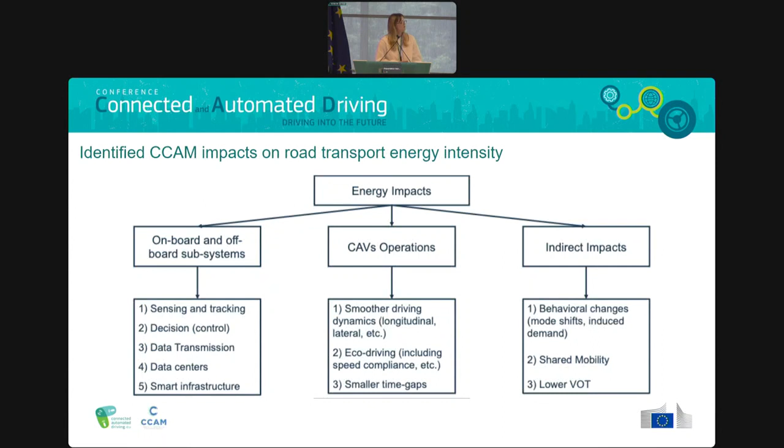So, for example, people switching from walking to automated mobility or from cars to automated mobility. So these are the 3 aspects that we identified. And then this is the framework which we followed.

So first, to understand how we can quantify this, we started with literature review. Then we classified the vehicle tasks, the tasks that the vehicle needs to perform to drive autonomously. And from that on, we conducted a workshop with members of the CCAM Partnership in March 2024 here in Ispra to validate our approach.

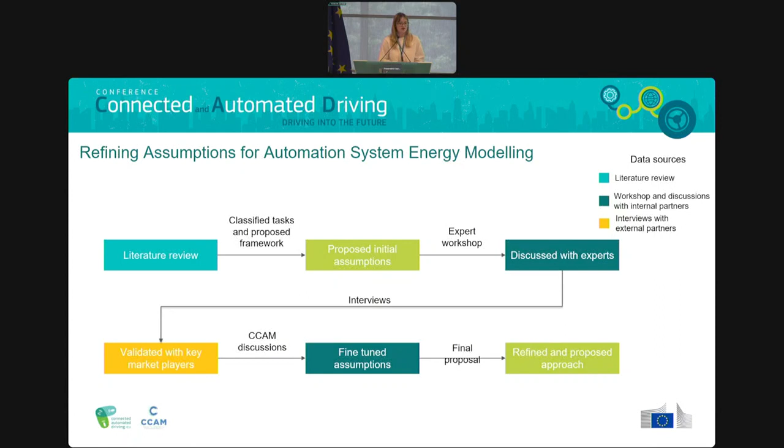After the workshop, we also conducted interviews with key external market players. And from then on, we started to refine our approach again with the CCAM members. And so the work is based on 3 data sources: literature review, the workshop with experts, so the contribution of the CCAM partnerships, and also information from the external companies and partners.

So what we can see here is the first pillar of the energy impact. So the energy consumption of the technologies that enable automation. And we have 4 configurations because we are, of course, not sure how automation will look like in the future. And first, let's start with the prototype configuration, so what we currently could have on the roads.

So what we saw is that there is full sensor redundancy, so we have LiDARs, radars, multiple cameras, and high onboard processing load that could sum up to 2,000 watts of power. Plus off-board energy for tasks like HD map updates and video storage. And this represents the early stages.

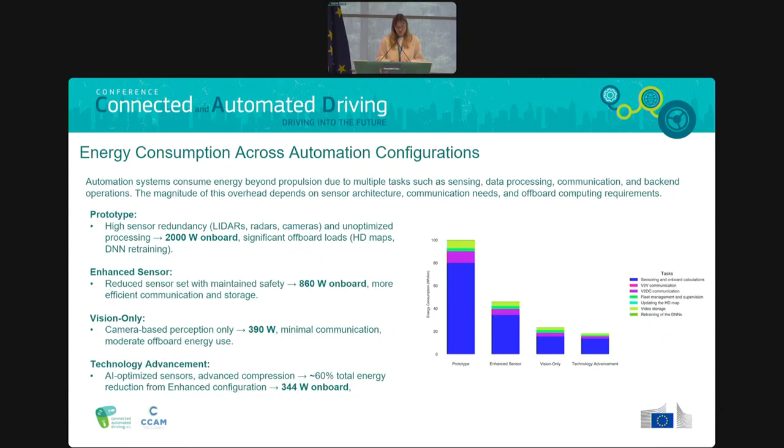Then we have the enhanced sensor configuration, and this reflects more mature market-ready systems. It uses a reduced and optimized sensor set, keeping the safety intact, while lowering onboard consumption to 860 watts. And communication and storage are also more efficient, cutting overall energy demand by more than 50% compared to the prototype.

And then we have the third configuration, which is a bit different because it's the vision only. So the car would rely only on cameras with no LiDARs and radars. So of course, again, the onboard consumption lowers to 390 watts, but it's still uncertain whether the industry will move in this direction at scale due to current concerns about the reliability in complex environments.

That's why the final configuration, the future configuration that we could envision, is based on the enhanced sensor setup. It assumes next generation sensors, edge computing, AI-driven data optimization, and more efficient communication protocols. And combined with smarter off-board infrastructure, so better data compression, hybrid storage, energy-efficient cooling, this setup could reduce the energy consumption of the automated kit by 80% compared to the current prototypes we have today.

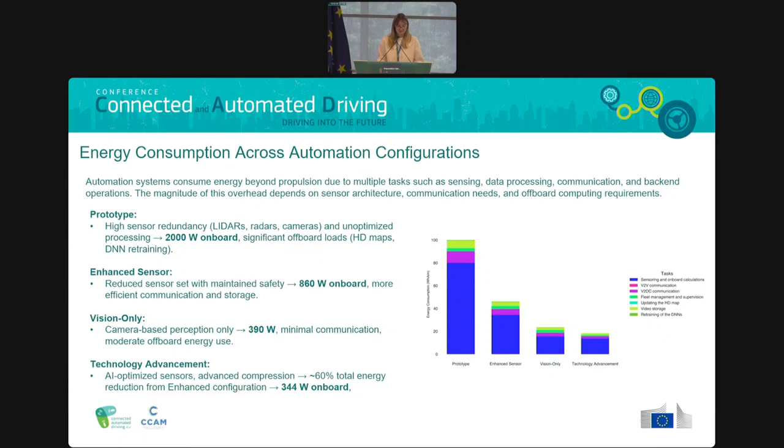First, they decide whether they will travel at all that day. Then they decide for what purpose, how many trips, which modes, where to, which time. It also allows to generate a stop on the way. And once we had all those travel patterns for every agent in the simulation, we implemented them into AIMSUN, which simulates the traffic flow and allows to estimate the energy consumption.

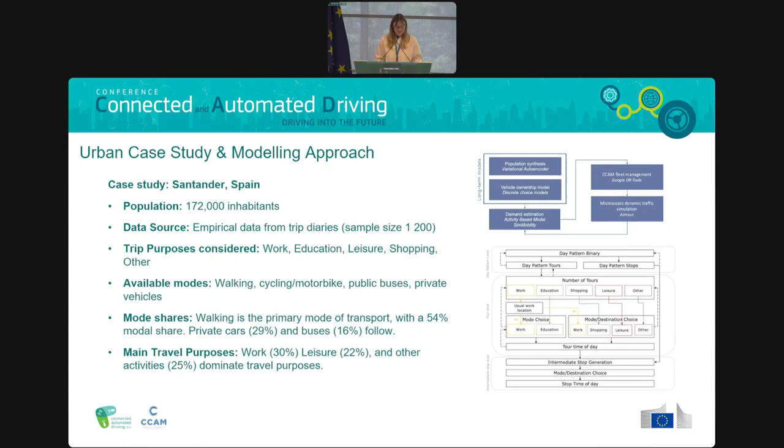And as a case study, we used Santander, which is a city in northern Spain with 172,000 inhabitants. And to estimate all those discrete choice models, we used the trip diary data from more than 1,000 people that recorded their trips for more than a week. And I will not go into too many details here, but I will link the report at the end.

So just to summarize, we wanted to understand exactly how automated mobility could be implemented and what that could entail. So we had a lot of scenarios. We had the baseline, which reflects the travel behavior of people from Santander today. And then we model 4 types of AV deployments. Robotaxis, which are smaller vehicles which can be shared or private rides, and can fit up to 4 people.

Then we had automated shuttles, which are larger and always shared with capacity of 15 people. More frequent buses, which would be automated, and that could mean that buses in Santander could run more frequently, but the assumption is that they keep the same network. And what would happen if the AVs were privately owned?

And we also included several policy and system-wide scenarios. A UVAR scenario in which the center is strictly pedestrian, a scenario where no private cars are used, and this was to explore mode shifts under extreme conditions, and a congestion effect, because Santander is not congested and we wanted to see what could be the results in a congested environment, in a more constrained network.

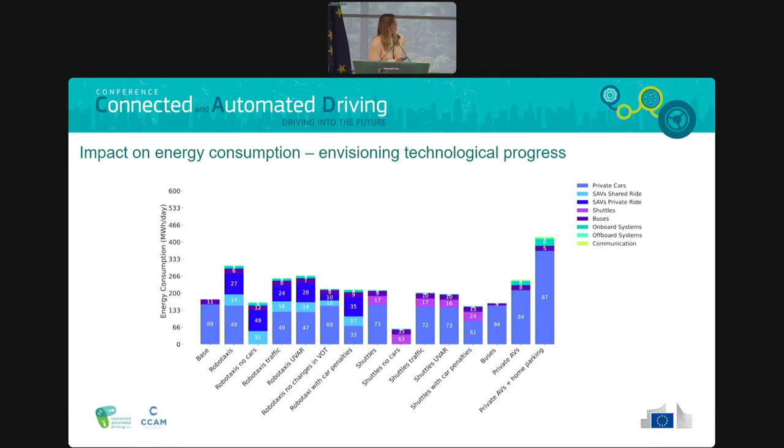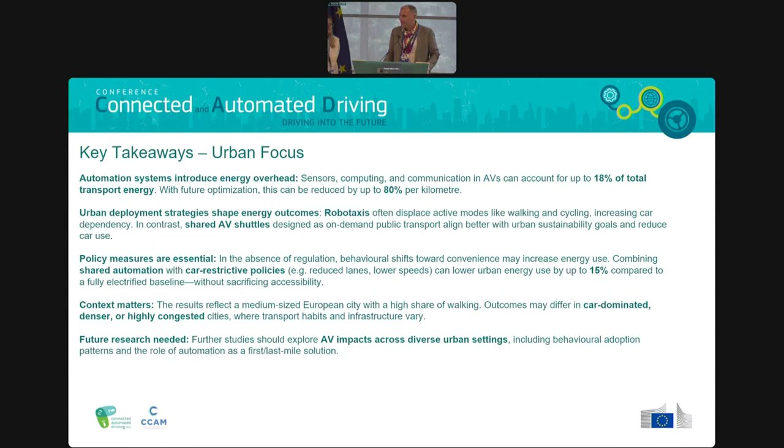Thank you very much, Ada. Don't run away, in case there are some clarifications, questions, or otherwise. I think Ada is here. You can also ask her during the coffee break. Huh? I cannot see. Very good. You have been great. Very clear.

Thank you, Ada. Now, I would like to invite our panelists, the first group of three, to react on what they've seen. So the first panelist is Bat-hen Nahmias-Biran. I'm sorry. I think it's pretty well. She's a senior lecturer at the School of Mechanical Engineering at Tel Aviv University, in Israel, of course. And she's also visiting professor at C4, Energy, Mobility and Climate, here at the Joint Research Center.

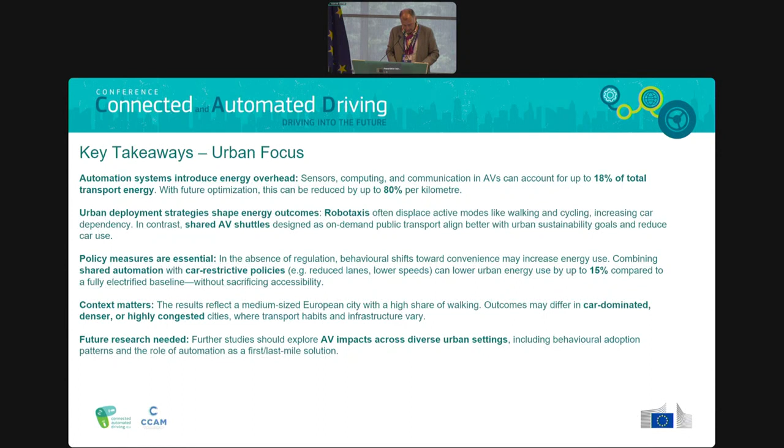The second in a row is Dimitris Milakis, European Research Coordinator at the Institute of Transport Research, DLR, and also co-leader of the Cluster 6 Societal Aspects and People Needs of the CCAM Association, with a research focus on transport innovations and society. And last but not least, the third one, Christian Scharnhorst, Director, Automated Driving, member of Cross-Domain Computing Solutions Division at Bosch, Germany. He has been appointed to the role of the CCAM Association Vice Chair until recently, from 22 until December 24. So I would like to ask my speakers, and you will be the first because you are in the middle.

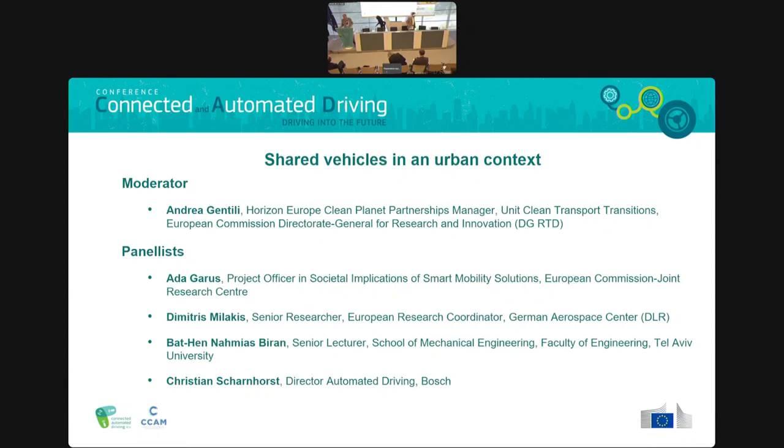And now we move on to the second section. It's on highways, extra-urban. My colleague from JRC, Costas Mattas, is already here. Costas conducts research on the impacts of automated driving systems and was responsible for the case that he will present to you. Costas, the floor is yours. Thank you very much.

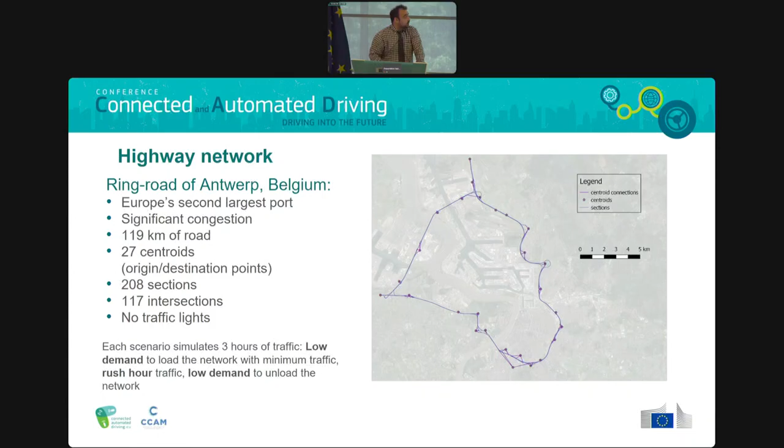Thanks a lot, everyone. So this is the highway part, and for the highway, our simulations were based on a model of the ring road of Antwerp in Belgium. What's important to notice is that all scenarios that we simulated had a duration of 3 hours, with the first and the last hour having a low demand, loading and unloading the network, and with the second hour being the hour of most interest, as we had the rush hour traffic for the specific simulated network.

Now, the vehicles that we have been simulating are of 3 categories according to their driving technology. We have simulated manually driven vehicles, for which we used AIMSUN, but we had to put in our own custom behavior models that, for the human drivers, we calibrated based on data from the highD dataset. So actual trajectories from highways in Germany, using Python and calibrating on macroscopic values. Then we have the ACC vehicles, and the ACC vehicles represent the low level of automation of ADAS systems that are currently available in the market.

And for those, it was similar models as with the manually driven vehicles. The difference is the car following model, for which we used a linear model with parameters taken from the literature, from studies calibrating on actual systems that are available in the market.

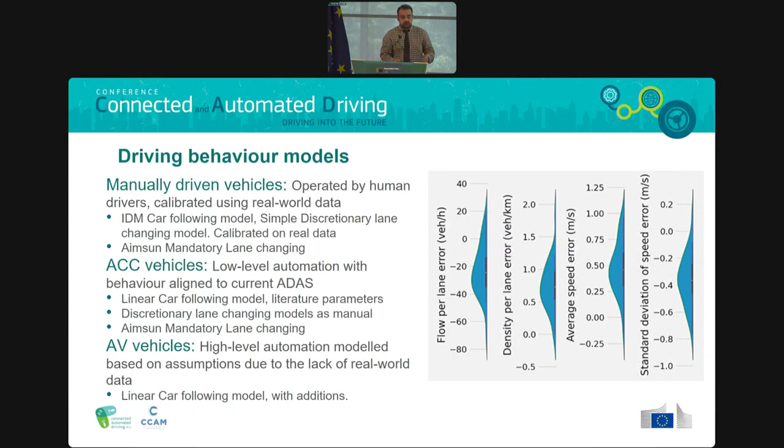And finally, we go to the AV vehicles, where we based the simulation on the models that we used for the ACC, but we had some specific assumptions about the differences between the ACC and the AV vehicles. And for these assumptions, the workshop with the experts was very, very useful for us to have valid assumptions as mentioned by the panel earlier.

So the first and the most basic type of AV is this AV basic, and there are 2 major differences. Firstly, the distance to the leading vehicle, counted as a time gap in seconds, is considered to be a little bit lower, from 1.2 seconds to 0.9 seconds. The second and even most important difference, what we got from the experts of the industry, was that automated driving systems are expected to have a perception and understanding of the traffic state around them. And based on this understanding, they could be able to do predictions and take actions based on those.

Now, instead of modeling each and every aspect of this behavior and simulating it explicitly, we went with simulating this predictive and fast-reacting behavior by slightly decreasing the reaction time from 1.1 seconds, as it was for the ACC systems, to 0.9 seconds. The only specific behavior that we did explicitly model was multi-anticipation, which means that the simulated AVs react to two vehicles in front of them and not just one.

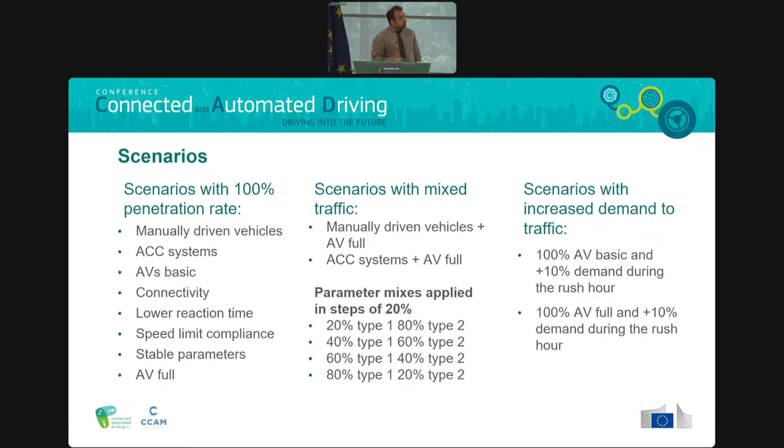Now, the scenarios that we have tested fall in three major categories. We have tested scenarios where all vehicles in the network are driven by the same technology, so 100% penetration rate. Those could be manually driven vehicles, ACC, and so on and so forth. Then we have scenarios with mixed traffic, and the mixes that we tested were only manually driven vehicles and AV full, and also ACC systems and AV full vehicles. Finally, we tested two scenarios with increased demand. So for AV basic and AV full, we tested with the rush hour trips being 10% more.

Now, for the rest of the scenarios that we tested, all of them had some beneficial impacts, with the best one by far being this one, the blue line, which is, of course, the AV full case. And what we see is that for the uncongested cases in the beginning and the end, the speed is a little bit lower than some of the other scenarios, and this is because, of course, they abide by the speed limit, so you don't have vehicles overspeeding.

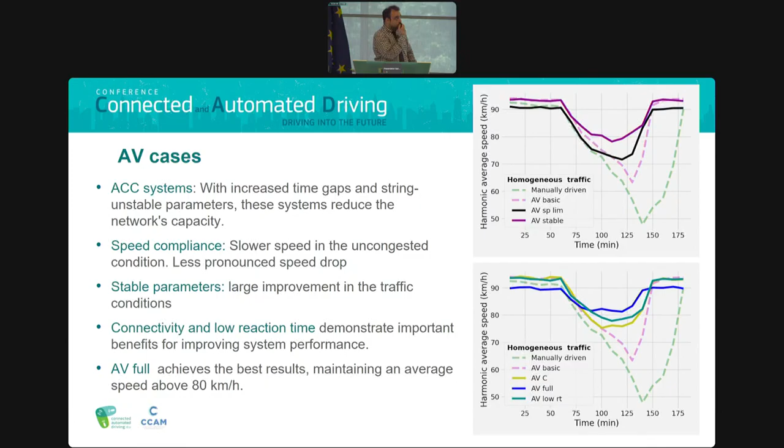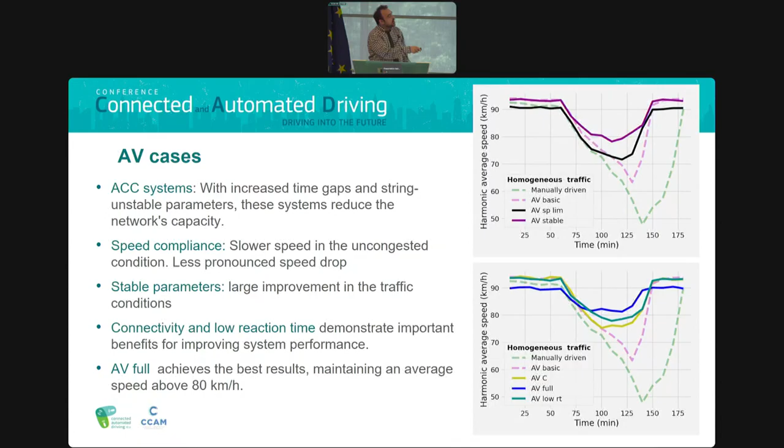But most importantly, during the congestion duration, you see that the average speed never drops below 80 kilometers per hour on average, and that the recovery to free flow happens almost instantaneously.

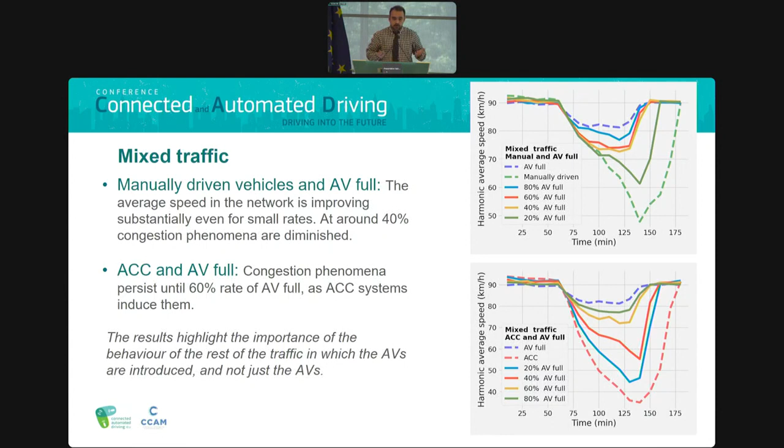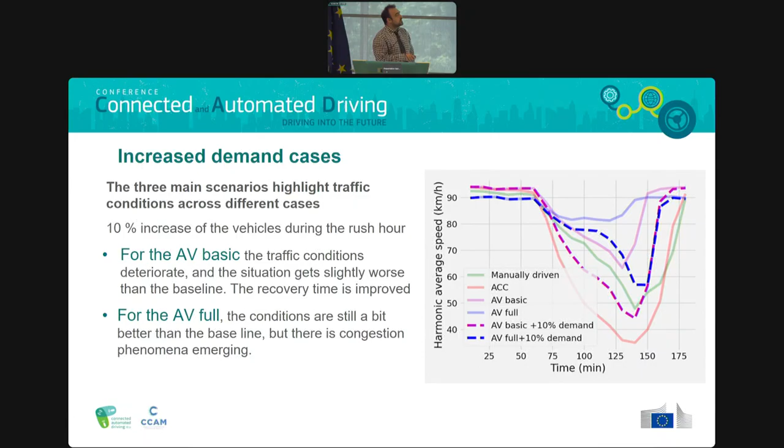Now, for the additional demand, what we see is that both for the AV basic and AV full, we have some deterioration in the traffic flow comparing to the same case with the same demand. However, what we see is that with the same infrastructure, without changing anything in the road network, the infrastructure can accommodate more trips, more demand, having similar traffic conditions as the baseline.

Now let's go to the important energy results. And the first and important thing to note is that indeed the propulsion energy with the blue color is by far the most important factor. And those y-axes are starting with 1 because for each and every one of those cases 1 megawatt hour is for propulsion. And we are just zooming in here for better readability. So indeed propulsion is important.

And for propulsion, we see that the ACC vehicles, of course, with this deterioration of traffic flow, increase the energy requirements for propulsion. And all the AV cases that we have tested have been decreasing, even if it's just marginally, the energy required for propulsion. However, when we also consider the energy for the automation kit, then this image changes a little bit. For the automation kit, the most important that we found was with the red color, the sensing and onboard calculations.

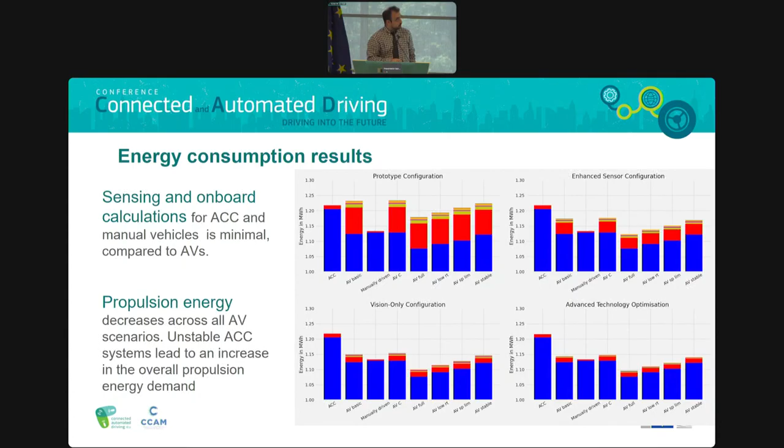And what we see overall with the results comparing to the baseline is that for the prototype configuration, in all of the cases, we had some negative overall impact in the energy consumption. We need at least enhanced sensor configuration, which is of course something that we should expect, to start seeing some positive balance energy-wise.

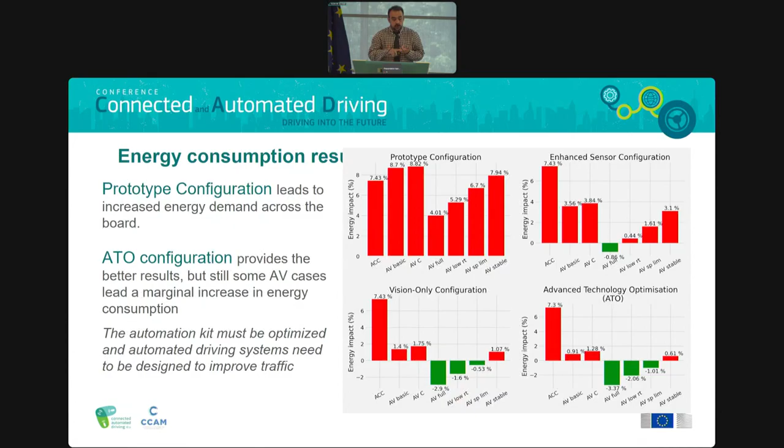Now, even for the best assumption for the automation kit, the advanced technology optimization, we see that not all of the AV cases are really giving us a benefit energy-wise. So we understand, first, that the automation kit indeed should be optimized, and it's an important factor, but also the automated driving systems should be designed in order to improve traffic.

Now, for the mixed traffic, we have some also very interesting results. We see here the mixed traffic between AV and manual vehicles. And as you may remember, for the prototype configuration, which is the more energy-intensive vehicles that we are not really expecting to have in full deployment, for 100% penetration rate, indeed, we have a higher energy request. However, for 20 and 40% penetration rate, so for the smaller penetration rate, we see some energy benefit.

What happens here is that we are introducing energy-intensive vehicles, but those vehicles are improving the traffic conditions, giving a benefit to the rest of the traffic flow. And in the overall balance for the whole network, for those low penetration rates, we see a benefit. However, this comes as a positive externality, and it's not really a benefit realized by the users of those AV full cases, at least for the prototype configuration.

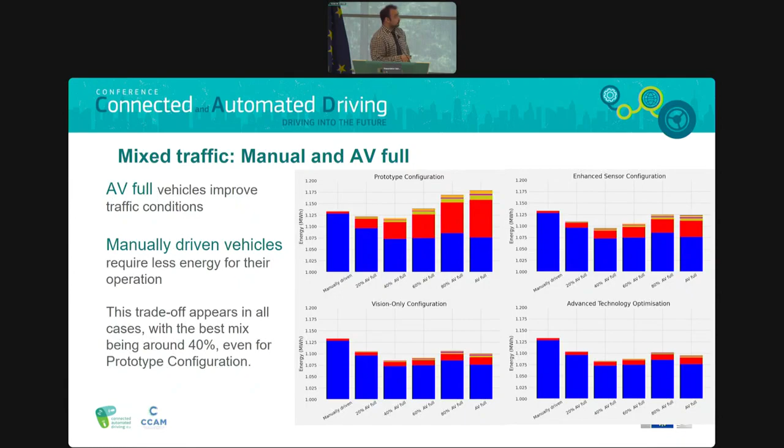So, to conclude with the main points, we need our AV systems, for the highway at least, to be designed to improve traffic flow in order to realize the best positive impacts. And if it is so, the positive impacts could be realized even for small penetration rates.

Moreover, this improvement in flow means that in some cases, the same infrastructure will be able to accommodate more trips. But in all these studies, another significant factor is not just the technology and the behavior of the AVs that we're introducing, but the technology and the behavior of the existing vehicles. Now, energy-wise, we see that optimization of the automation kit is something that we have to keep in mind, as discussed also for the urban case.

What we have also seen, and you can see it also in the report that I will link in the next slide, is that with the increased demand that we were able to accommodate, of course, comes increased energy demand for the network, energy consumption. And we have found a very interesting case of those positive externalities and potential equilibrium phenomena that we might need to investigate a little bit further.

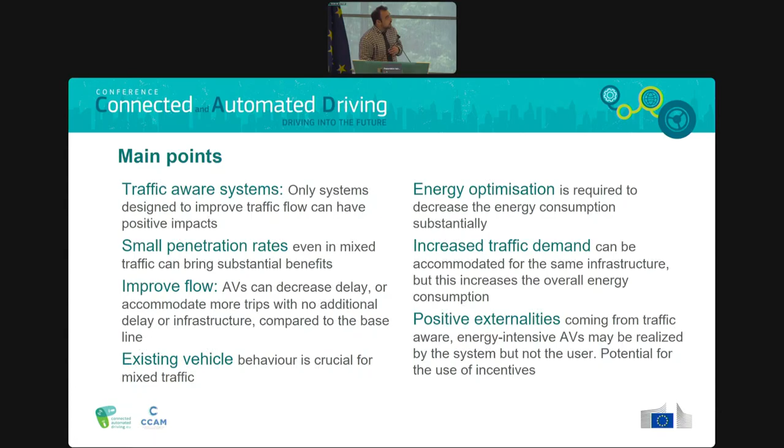Thank you, Kostas. Any questions? Any request for clarifications, or everything is clear? Okay, it seems you've been effective. Thank you very much. Very good. Another big applause for Kostas.

And now I would like to call next to me the three panelists of today. I start with Alina Aitoniemi. She's a senior scientist at VTT, well-known research centers in Finland. Recent work includes assessing energy use, emissions, travel time impacts of automated passenger cars on European motorways and urban roads. She's been working in the project L3 Pilot, HI Drive, and also involved in the common evaluation methodologies for CCAM, the famous FAME projects.